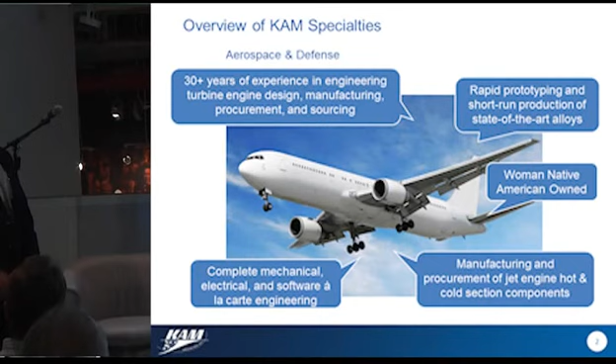And many of you know who KAM Specialties is, but for those who don't, I'd like to take a brief introduction to let you know what we do. We've been in business for 30 years here in South Florida in engineering, turbine engine design, manufacturing, procurement, sourcing. We do rapid prototyping, short-run production of state-of-the-art alloys.

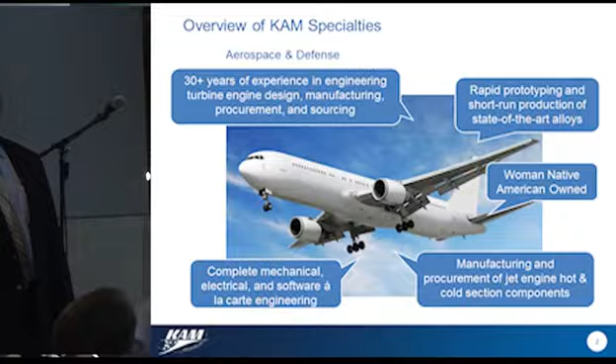We do complete electrical, software, and a la carte manufacturing services. So we are trying to focus on companies that are looking to turn their fixed costs into a more variable approach with our engineering staff. We are a woman-owned Native American company, and we manufacture and procure jet engine components for both hot and cold sections.

We are more than just an engineering and rapid prototyping and raw material sourcing company. Our customers include Pratt & Whitney, Boeing, Rolls-Royce, Lockheed Martin, Aerojet Rocketdyne, GE, and UTC Aerospace. And more than just military and aerospace, we focus on industrial and energy applications, medical devices, and consumer electronics.

3D printing of plastics, again, is a revolution. It is predominantly where 3D printing has been evolving from. We can get to the market faster with traditional plastics than injection molding. And one of my friends here runs an injection molding plant, and we're not here to completely disrupt your technology, but we're here to make some of the prototyping and advancements in design much easier and faster to sometimes hand it off to high-volume manufacturers.

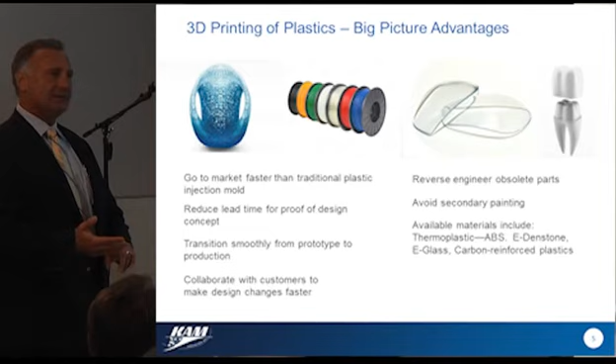We reduce lead time, proof of design concept, transition smoothly from prototype to manufacturing process, primarily in high-mix, low-volume, high-value propositions. So we're not here to try to make spoons or forks that you would traditionally make in China, but we're looking more for design concepts and products that we can manufacture in the prototype process, in the manufacturing, without any of the traditional tooling and investments you would have to make to get to that level.

And what are those processes? We all know SLA molds, soft tooling, aluminum tools, and then P20 steel in order to get those products to market. A lot of times, marketing gets it wrong, and we'd like to try to build a model where we manage inventory and turn your business more into an ETO, a build-to-order process. So your inventory costs are almost eliminated.

We can reverse engineer a product. You have no designs, use 3D imaging, 3D graphing to actually create a part without a drawing, and we can rapidly get that into production.

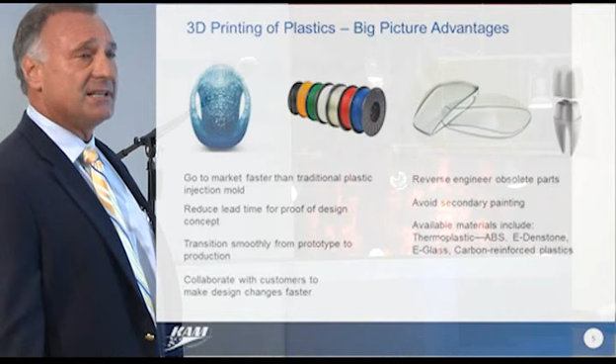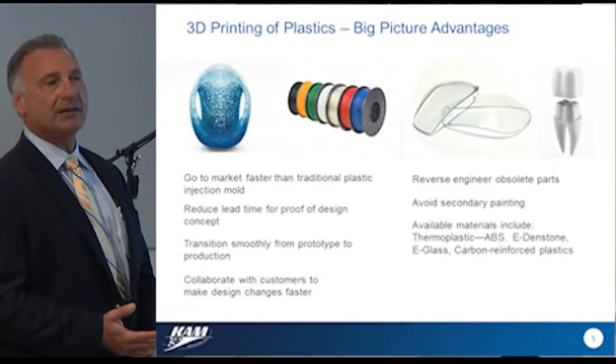We can avoid all the secondary painting processes and actually produce the product in the Pantone colors that are commercially available. It's available now in thermoplastic ABS, which you see in your cell phones, vacuum cleaners, E-Denstone for dentures, E-Glass for clear optics, carbon reinforced plastics, and now even ceramics are coming out.

3D printing of plastics production advantages: again, eliminates prototype tooling costs, avoids design change NRE costs. Most of you know every time you make a design change, it's a $2,500 flat fee. Those are a few hundred dollars, if that. Minimal programming costs, avoid hard tooling costs, and lead time, as we mentioned before. Reduces sheer number of parts. So instead of having an assembly that has 10, 15 parts, we can reduce that down to maybe 1 or 2.

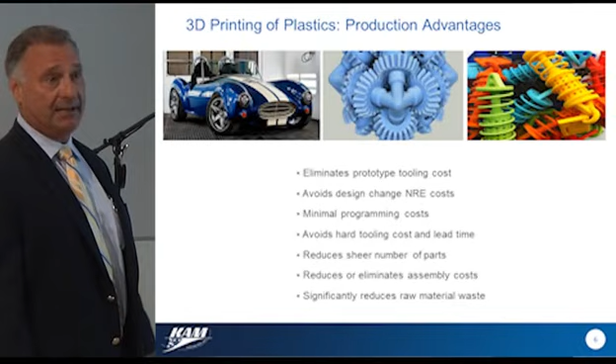Reduces and eliminates assembly costs. We reduce the number of parts, complexity, and eliminate labor costs. It significantly reduces raw material scrap, and that's key to the process.

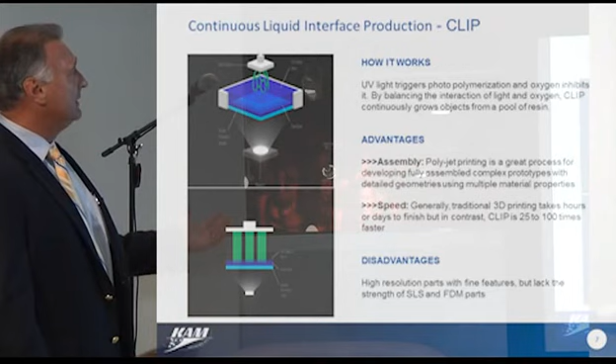Another process that goes along with plastic is continuous liquid interface production, called CLIP. CLIP uses UV ultraviolet light that triggers photopolymerization, allowing oxygen to inhibit it. It actually develops a part under light and continuously grows the object from a pool of resin.

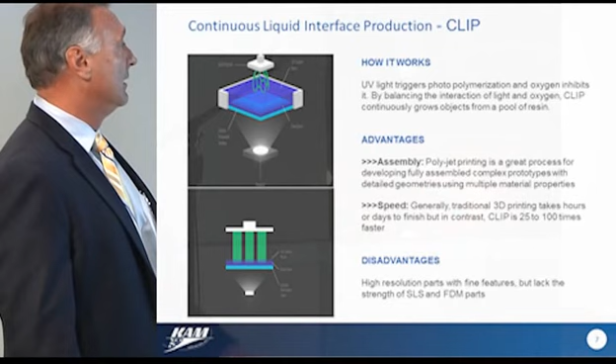Amazing process. The advantages are, polyjet printing is a great process for developing fully assembled complex assemblies and prototypes with detailed geometries using multiple material properties. The speed is amazing. With traditional plastic 3D printing, it could take hours, sometimes days. CLIP is 25 to 100 times faster.

Ford Motor Company is developing a process and trying to expand the footprint, actually starting to make automobile frames, parts, and major structures out of the CLIP process. That's brand new emerging technology for the automobile industry. Sort of like the Terminator.

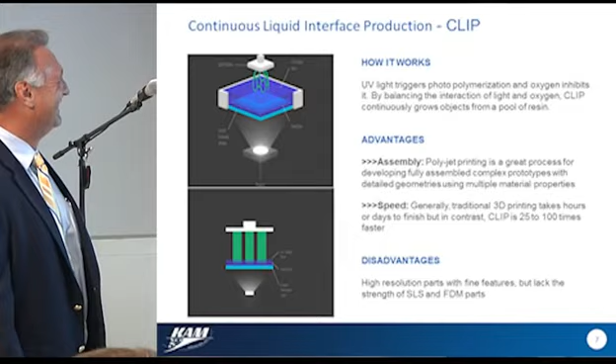So on the flip side, plastics has been the emerging market, but it's now gone into metal technology. DMLS, direct metal laser sintering, is one of the most commercialized processes now, and it's becoming more mainstream because it can be used from prototyping right into production.

Again, it significantly reduces lead time, makes parts in hours instead of weeks, eliminates proto-tooling costs, and results in less material waste. Major material waste happens with sheet metal stampings, blanks, and hogging parts off from bar stock. All that excess material is eliminated, which increases your margin and your position in the marketplace.

Design changes can be made quickly without any costly tooling NREs. Every time Snyder wants to make a change, it's $2,500. Now it's maybe $100, a couple hours to make a change, and you're making parts again in hours or days instead of weeks or months.

We can use 3D scanners again to reverse engineer obsolete parts, same kind of concept. Parts now are stronger than conventional machining because of the way it's layered and heat treated at the end, eliminating porosity, inclusions, and a lot of the challenges you'd otherwise have.

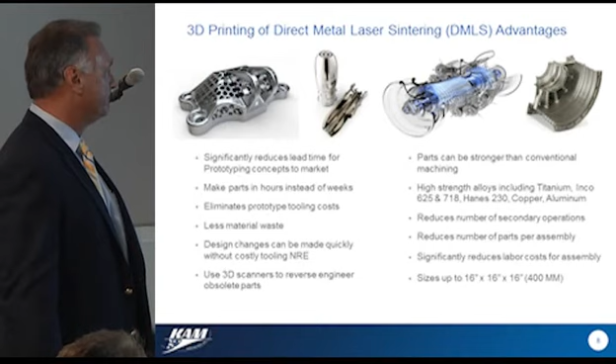It reduces the number of secondary operations. Again, no hipping processes typically, and you don't even have to machine some of the surfaces. They're producing parts that are just as good as machining, except when it comes down to severely tight tolerances with major surfaces. But now we're only talking about one or two processes versus a multitude of CNC processes that take time, money, and speed to market.

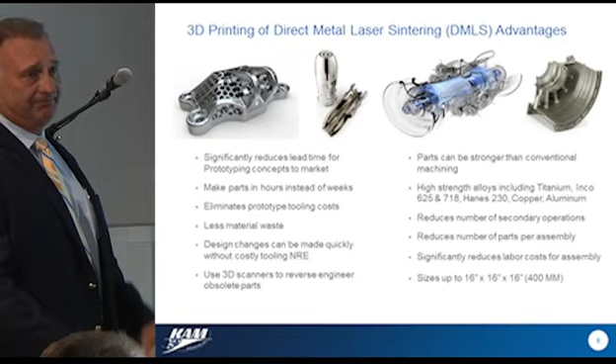It significantly reduces labor costs again for assembly, because you can eliminate the number of parts, and it can be completely assembled during that whole DMLS process. Sizes now are 16 by 16 by 16 inches, and it's growing rapidly.

DMLS applications, again, turbine engine, hot and cold section components. Pratt & Whitney, GE, NASA, SpaceX are really running into this market, and they're looking for capacity. That's what we offer our clients: a gateway into the capacity, and engineering expertise to guide you along the steps of product development.

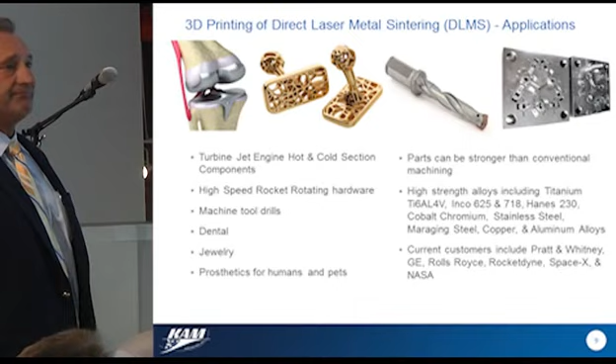Machine tool drills, right out of DMLS, ready to start cutting. Dental, jewelry, molds to make injection molded parts, prosthetics for humans and pets. The high strength alloys include, again, titaniums, Inconels, cobalt, chromium, stainless steel, maraging steel, copper, and aluminum alloys.

Another process, like DMLS, is called EBAM, electron beam additive manufacturing. This uses a more wideband electron beam instead of a laser focus like you find in DMLS. This can reduce your costs and lead time by sometimes 80% over conventional CNC manufacturing techniques.

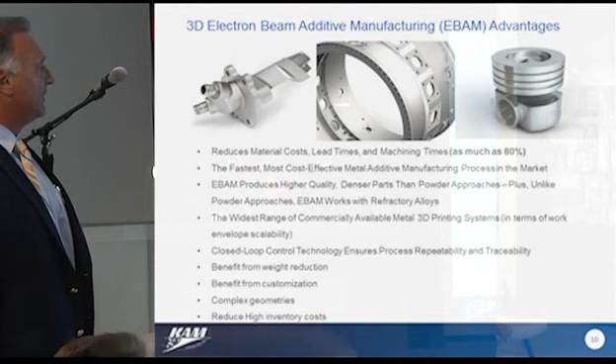It's the fastest, most cost-effective metal additive manufacturing process available in the market. EBAM produces high-quality, denser parts compared to the powder metal approaches you find in DMLS. It offers the widest range of commercially available metal 3D printing systems in terms of envelope and scalability. The bigger the size, the bigger the platen—that's what this technology offers.

You benefit from weight reduction, customization, complex geometries, and avoid high-cost inventory for these types of parts. You can turn it into more of a just-in-time approach, saving on inventory costs and inventory terms.

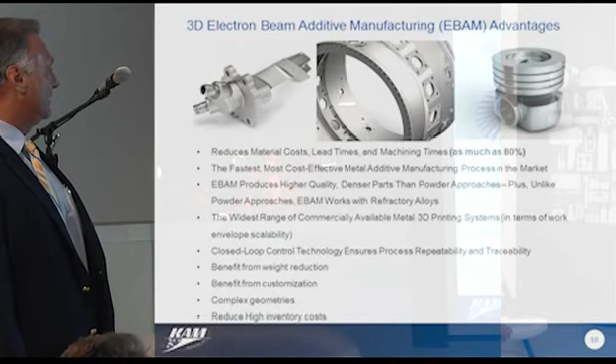Applications include aircraft parts, oil and gas equipment, nuclear components, refractory metal components, industrial pumps, power generation, semiconductor manufacturing equipment, tooling, marine propulsion—anything that has metal in it. We have the materials and techniques available to produce a part in a high-mix, low-volume application with high value add.

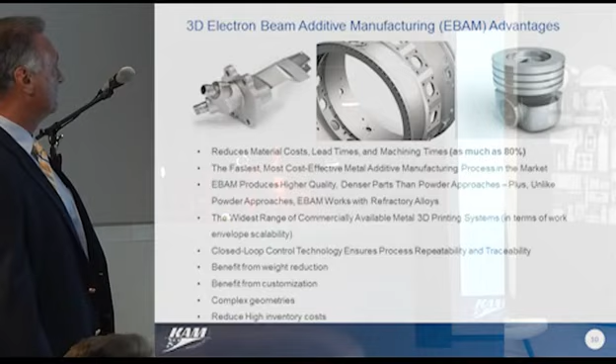The pros and cons between EBAM and DMLS. EBAM uses that electron beam to melt and diffuse the layers, so it's not as tight as DMLS would be with a more focused laser beam. Lower focus, it uses much less material, faster cycle time, more applicable for orthopedic implants.

As Bill pointed out, EBAM has the largest build envelope with 3D printed metal parts and fewer supports and anchors needed to create the part. On the other side, DMLS uses lasers to melt and diffuse the layers, but it has one good advantage over EBAM: each layer can be done within 30 microns, which can hold accuracy within 0.1 millimeters.

So you can produce a part without typically any secondary machining in DMLS. With EBAM, you probably are going to have to go in and do surface cuts and gating surfaces to make sure that your fits are tight and clear, as you would in a CNC machining process.

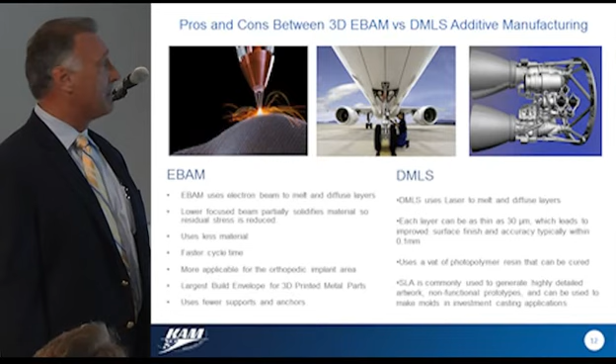SLA uses a bed of polymer resin that can be cured, and it's commonly used to generate highly detailed artwork, non-functional prototypes, and can be used to make molds and investment casting applications.

Again, 3D printing, set to revolutionize. Manufacturing, 3D printing of a pistol—we've made it already. Rolls-Royce has made the largest 3D part of a major jet engine section, and they're even using parts in supersonic cars. The applications are endless.

Additive manufacturing has grown by more than 75% last year because it's becoming more commercialized—developing business cases that are qualifying and certifying parts for flight and orthopedic implants. A perfect fit for high value, low volume sectors.

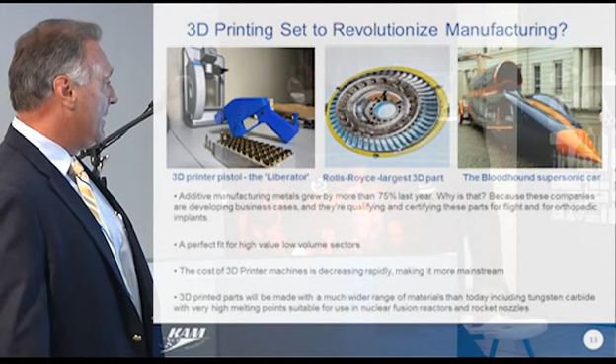The cost of 3D printers are coming down. The size of the envelopes are growing rapidly. 3D parts can be made with a much wider range of raw materials, again, in the most exotic, high-strength alloys you can imagine.

There it is. Most everybody here is probably not a rocket scientist, an engineer, or an inventor. But let's just imagine you want to go back to the future—everybody knows Doc Brown and Marty McFly. What were they looking for? They were looking for a flux capacitor, and they couldn't find one.

But just imagine now using 3D technology, we can turn around and make that part just like that. So 3D technology, the applications are endless.

KAM Specialties can help transition your company and help you choose the right approach for your business model. Again, we can take your 3D CAD file, we can take a part and reverse engineer it, we can design it from scratch, we can make it happen. We can make sure that your parts arrive on time and you're the fastest to market, and we'll get it done. Thank you very much.

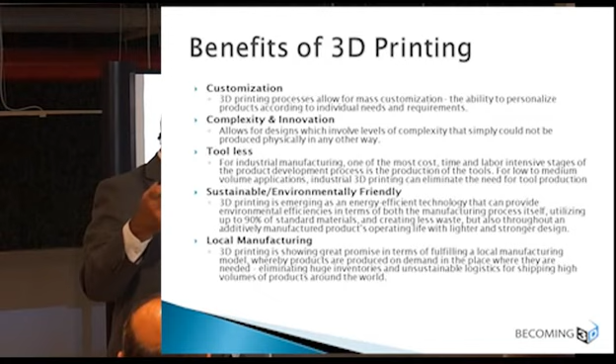So now we start to get into things like being environmentally friendly - it's greener. They're going to be able to save fuel by operating their jets with these kinds of parts. But even when you think about being greener, take this octopus - subtractive manufacturing means I had to start with a block of plastic and carve away all the stuff I didn't want, to be left with the octopus. Think about the amount of waste involved in doing that. With 3D printing, there is no waste - there was absolutely zero waste to print this little octopus.

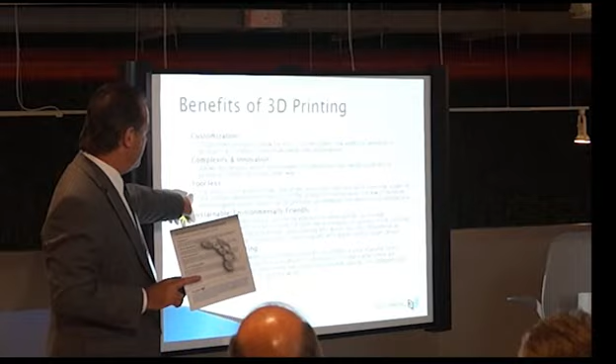Or the reverse, if you make the mold to make that. So you think about some of these tools - this was brought up several times. With traditional manufacturing, a lot of the cost goes into manufacturing or making the tools to be able to manufacture the parts. Since we can print the parts, we start to get into a toolless environment - huge cost savings for manufacturers to bring into this space. I know China was brought up a couple times - I've read articles where the Chinese economy is fearful of what 3D printing can potentially do to them.

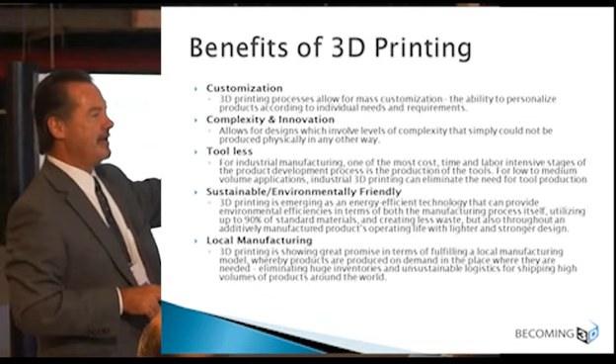If we stop sending our prototyping manufacturing to China and start doing it locally, because we're giving companies the capability to prototype locally, we can seriously impact the economy in China. And oh, by the way, positively impact the economy in America. So this is a technology that just has tremendous amounts of implication.

But what are the things we found around this industry? Grant and I are pretty new to this, so we went out and talked to companies. One of the things we found is there's definitely some challenges. Technology is progressing, the materials are progressing, a lot of things are happening.

But you know something? Unlike your photocopier, they don't understand the service model. Your photocopier breaks in your office - what do you do? You call some 800 number, talk to some tech support guy, they send a repair guy out the next day, and by 3 o'clock the thing's fixed, right? That's not really the case in 3D printing. The 3D printing companies are just not at that model from a service perspective.

We found out in an electronics manufacturer, they waited 1.5 weeks to see a service guy. And on some of their legacy older equipment, 4 to 6 weeks before they can get a service tech out there to actually fix it.

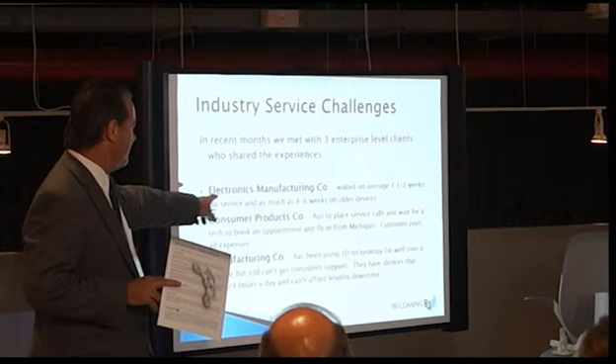Consumer products company here locally as well - sure, they waited, they got a service tech to come out, they flew out from Michigan, and they had to pay all the expenses for that technician to fly down from Michigan to actually fix the printer. And that, again, took weeks to arrange for that to happen.

And down here, you can see this company - they run their printer 24 hours a day. They just have so much demand for their 3D printers, it's running 24 hours a day. So if there's any downtime, look at the impact that downtime has on their business. So guess what? Becoming 3D, we're going to fix that. We're going to fix some of those things.

First of all, we're offering best-in-class brands - I'm just going to get into that in 1 second. But we're not sitting here trying to say, this is what I do, this is what I sell, so I'm going to find a way to make it work for you. No, what I want to do is go out and find out what are some of your challenges, what are some of the things we can help you with. And through some of our partners, like Charlie and David, we can find the right solutions to meet the needs and the different requirements that you have. That's what we're here to do.

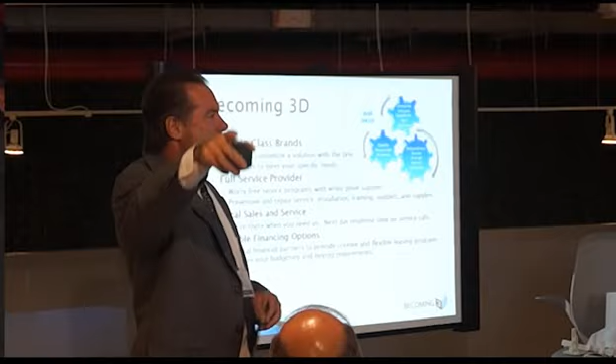3D printers are great, and they better work, right? And they're local - we're not going to be putting people on planes to go out and fix your stuff, or salespeople. We've got a couple of salespeople - we've got April and Marty back here, both from Becoming 3D. We've got Matt over there in marketing. We have local resources for you to work with.

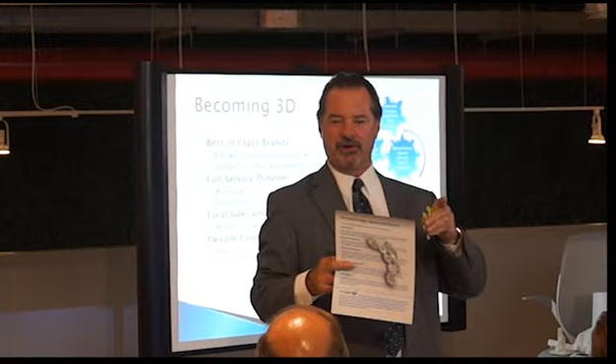Both from a sales and a service perspective, we have Cody in the back, also from Becoming 3D, to go out and help you install, help train your users how to use them, to come out and not just fix your printers and everything - how about preventative maintenance? How about we go out there and actually lubricate some of the stuff before they actually break? We've got programs to be able to do that. And that is something that is really industry-setting because our competitors aren't doing it.

We also offer some flexible financing options. We understand that people have budget requirements. We're going to provide you flexible financing programs - whatever you're purchasing, whatever your budgetary requirements are, we're going to find ways to meet them. I had a meeting with a customer this afternoon that had certain requirements from a capital budget perspective. We're able to create a financial package that's going to meet those requirements.

And I talked about product portfolio. 3D Systems is number 2 in the industry. In fact, number 1 in the industry for many years until Stratasys just keeps buying up all these itty-bitty companies. But 3D Systems, we're a leader in the industry.

Dave talked about the different technologies around 3D printing and how they're applied. These guys offer it all. We have a portfolio of 3D Systems that go from the little desktop filament machines like you saw running downstairs printing beers, all the way through direct metal print. They have multi-color, multi-jet, multi-materials, all in the same print. They have print envelopes to go from the little itty-bitty detailed custom rings to the very large, 18-inch part. So we're representing some of the best in the industry.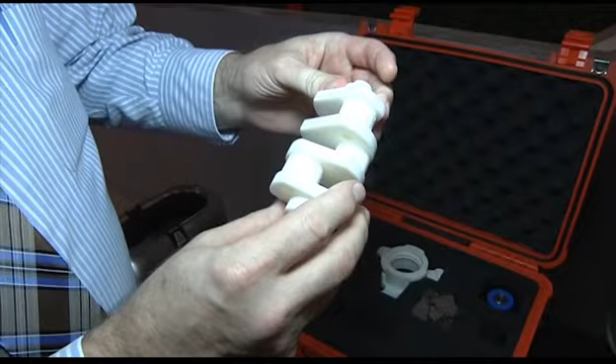And then some of the parts here, these are made from the SLA process, and you can tell by feel how extremely well made they are. You don't feel the striations you do in another part - like this, you can feel the striations. There's a difference there. This metal... amazing part. These little gears.

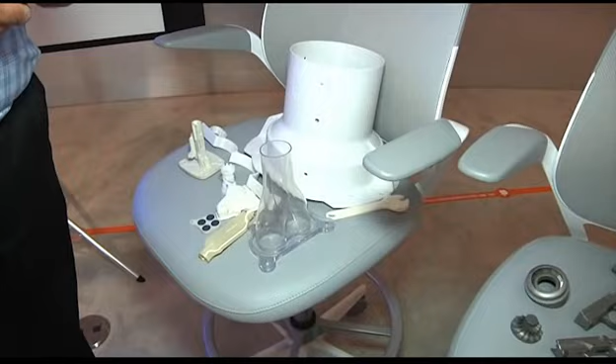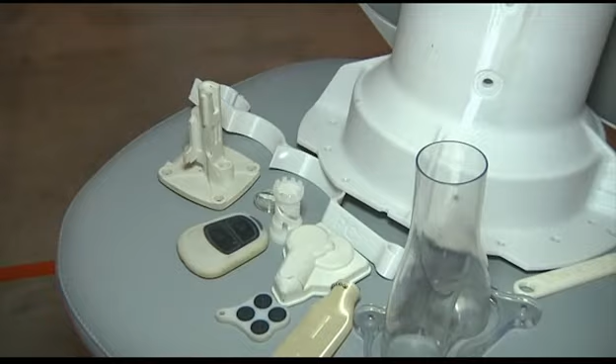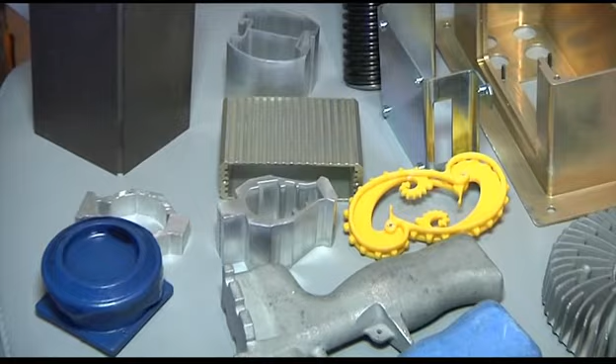Equivalent to a press.